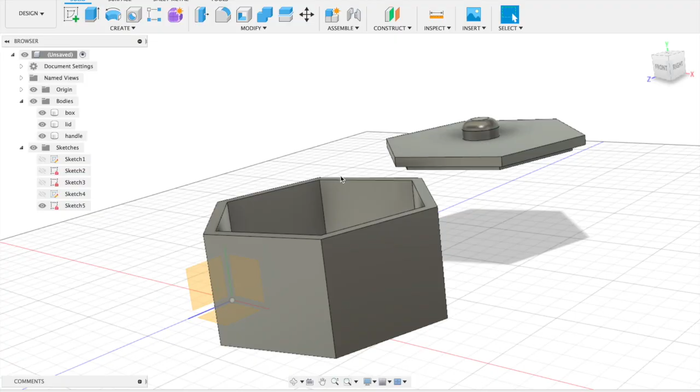Welcome to Fusion 360 Build a Box. We're going to do a quick tutorial on how to build this hexagonal box with a lid and kind of a handle knob at the top.

It's got the inset lid as well, but we'll be using some of the same tools and some new tools as well. First, create a new design.

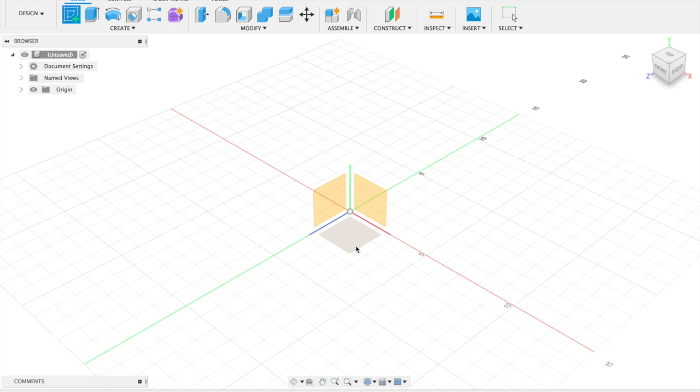File, new design. Then turn on your origins, create a sketch, click on the bottom plane, go to create, and we're going to use the Polygon tool.

You can play around with these, but this is the one we're going to use in this tutorial, the edge polygon. Click, and I'm going to make it about 5 centimeters on one side, and as you drag out you see it creates the polygon.

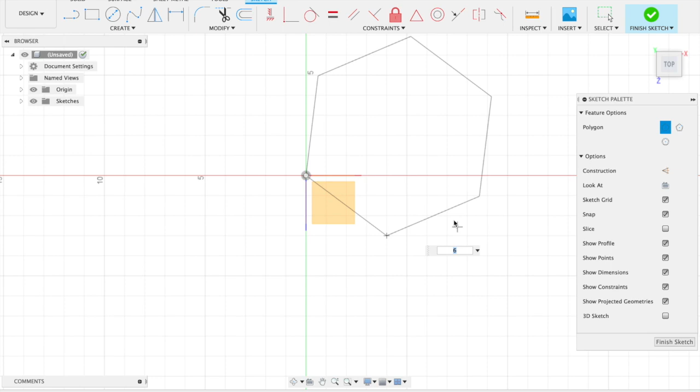You can change the number of sides. Wow, that's a really big one. But we're going to stick with 6.

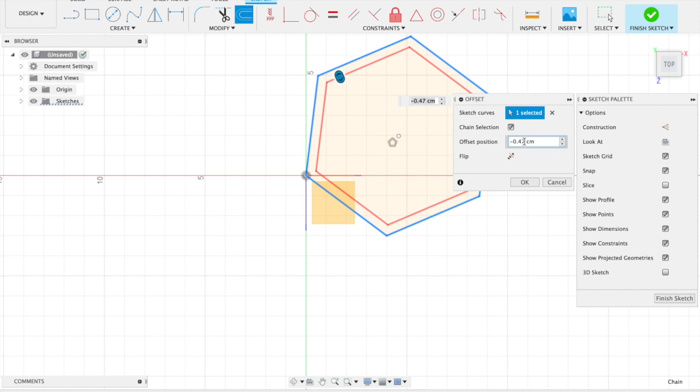We're going to do an offset of that polygon to create the walls in the box, and we're going to change that to 5 millimeters, which would be 0.5 or negative 0.5 centimeters. Then stop the sketch.

You can click on both of these sketches or planes. We're going to use the inside one first to form the bottom of the box, and we're going to bring it up not 5 centimeters but 0.5.

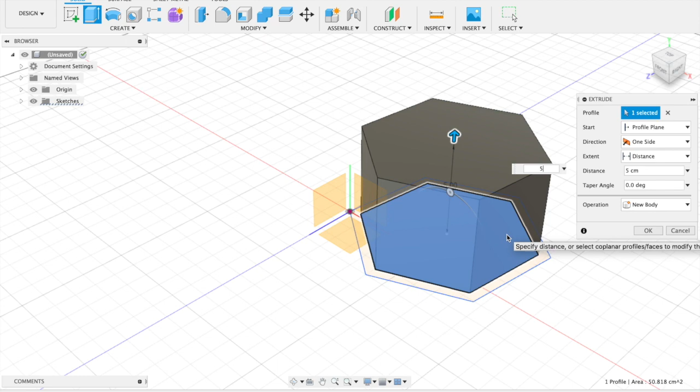There we go. That's the bottom. When you finish the extrusion, it turns the sketches off, so go ahead and look in your browser, make sure you have them, and turn the sketch back on so you can see it.

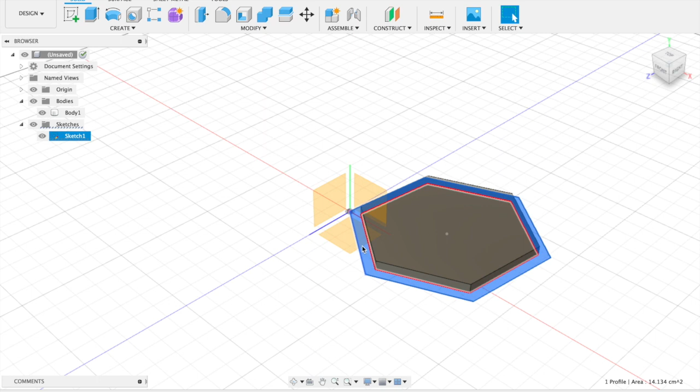Click on the outer hexagonal pathway and do an extrusion again and bring it up to 5 centimeters. Looks good. We are going to join it with the bottom so we have a completed box.

So make sure it's on join, click OK, and body 1 is now the box. It looks fabulous, doesn't it?

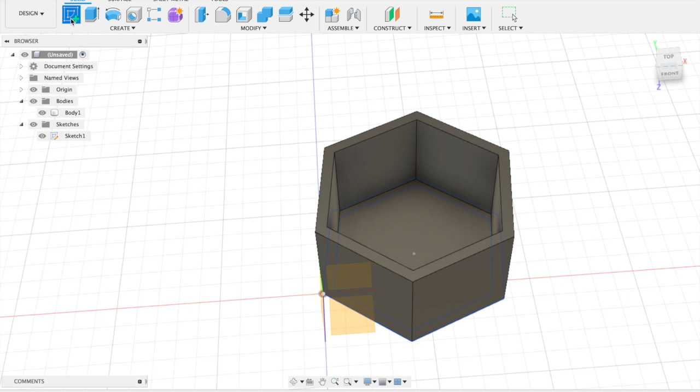Okay, the next thing we're going to do is we're going to create the lid. We're not going to use the split body and the shell. We're going to create a sketch, and we're just going to click on the top because that's where the plane is that we're going to create the lid.

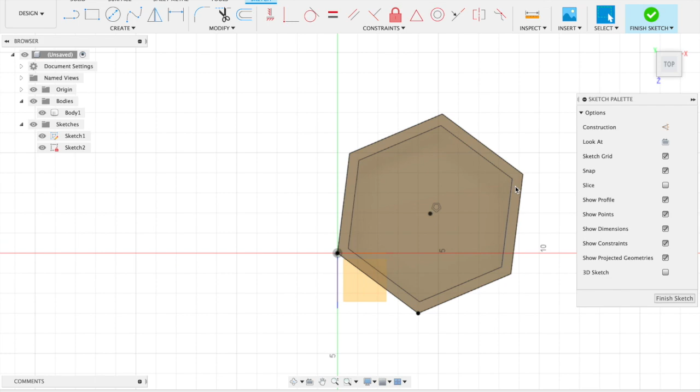Now we need to create a sketch of the polygon here at the top as well. So I'm going to start the sketch on the top and go back to polygon, and I'm just going to trace one of the sides just like I did on the bottom, and click OK, and you can see now I can do the same thing I did on the bottom plane, and I can click extrude.

Click on, I want both of those planes because the lid will be the whole thing. So I'm going to click that up 1 centimeter. No, I think I'm going to make it 0.5 centimeters, which is 5 millimeters.

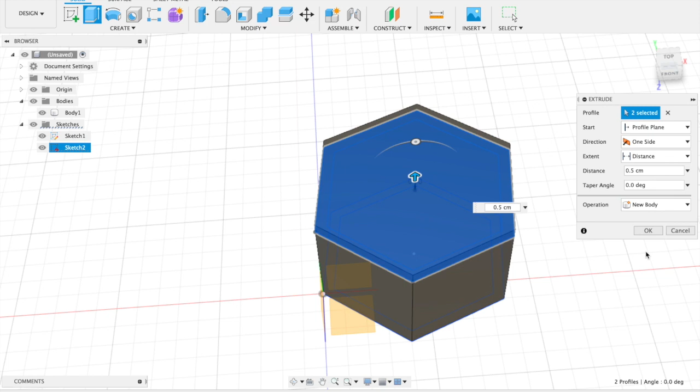I do not want to join it. I want the lid to be a new body, and click OK. You can see over here I'm going to change the name of the box to box, and I'm going to change the name of body 1 to lid.

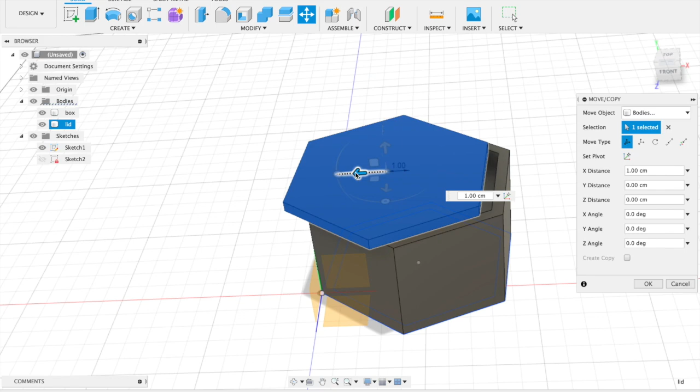Alright, that's fabulous. Now I'm going to move the lid out of the way by clicking the move tool. Click on the top and just use one of the arrows to move it out of the way. Just like that. Once you're done moving it, click OK.

And we can look at the bottom because we need to make the inset. So again, create sketch, click on the bottom. We go into sketch mode.

We're going to use that handy offset tool. We can click on the sketch that's on the bottom and put it inset again. Same thing, negative 0.6 should give a millimeter of difference.

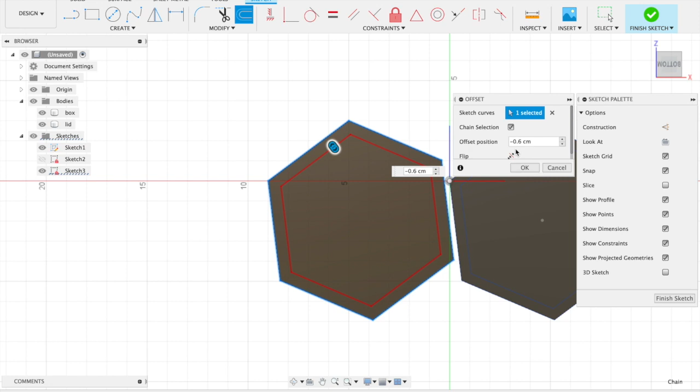Hit OK. Go ahead and stop the sketch and click on that center part, which will go down into the box. Click extrude. Make sure you click both of them, and then 0.3 should be enough. 0.3, and we're going to join it because we want it to be part of the lid.

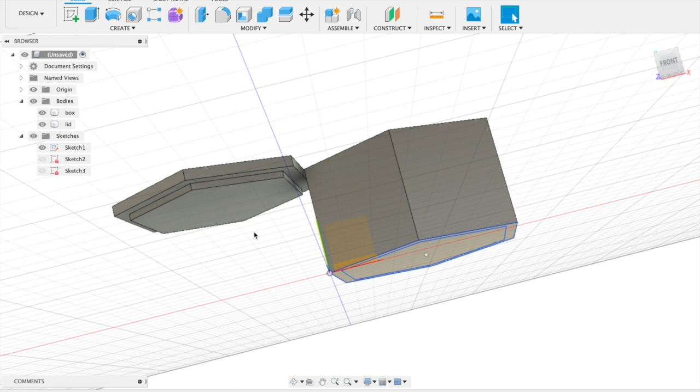Okay. Now we're going to work on that knob or the handle, the circular handle. We can create a sketch.

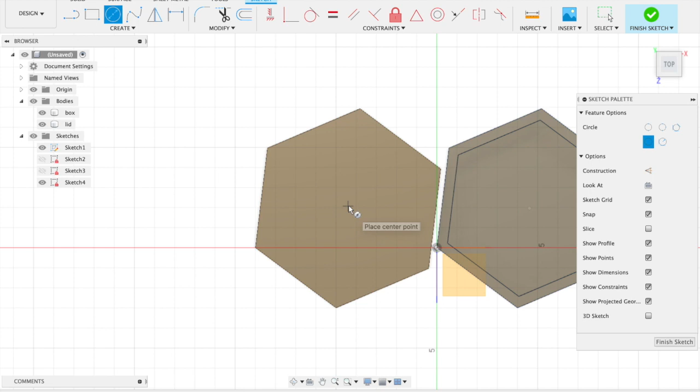This sketch is going to go on the top of the lid, and we're going to draw a circle just in the center. We're going to print this separately so we can glue it on in the right place, but we're going to make it 2 centimeters.

Okay, so go ahead and stop that sketch. Now we can use the extrude tool again. We're going to click on the circle, and we're going to extrude it up, let's do 2 centimeters. Let's see if that works.

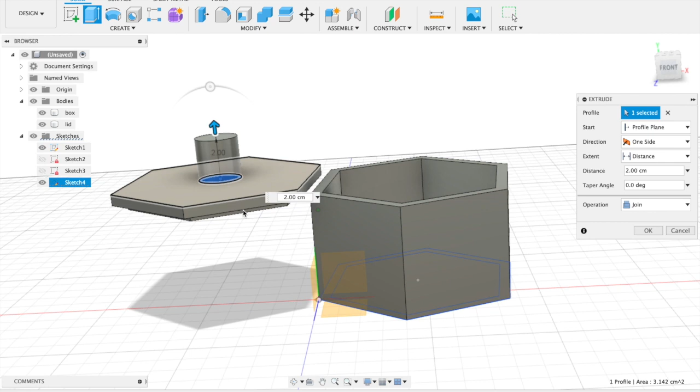We do not want to join it. We want to click it as a new body. That will be our handle. Hit OK. And now we're going to round it off a little bit.

Oh, first I'm going to just change the name to handle. And we want to round off the knob and make it a little bit more rounding by using the fillet.

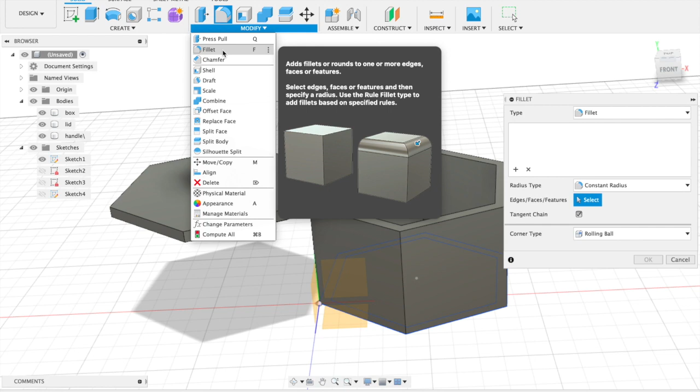Click on the fillet tool right here in the modify. You can click on any edge of any body and kind of round it off. It's a nice way to make some design modifications.

Okay, so I'm going to do that again. Fillet, click on the round, and then round it down like that. So that's as much as I can.

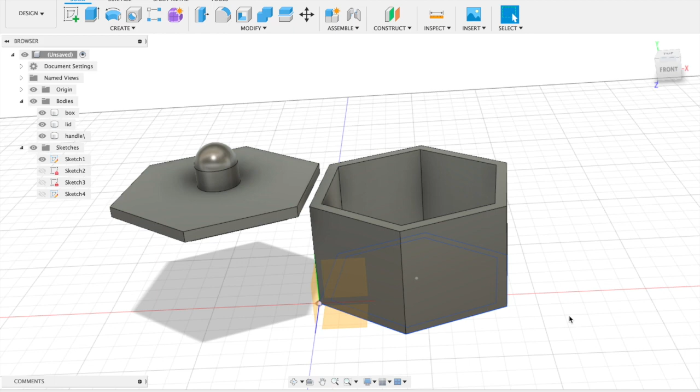Okay, I don't really like the top of that knob. It's a little too large, so I want to shorten it a little bit.

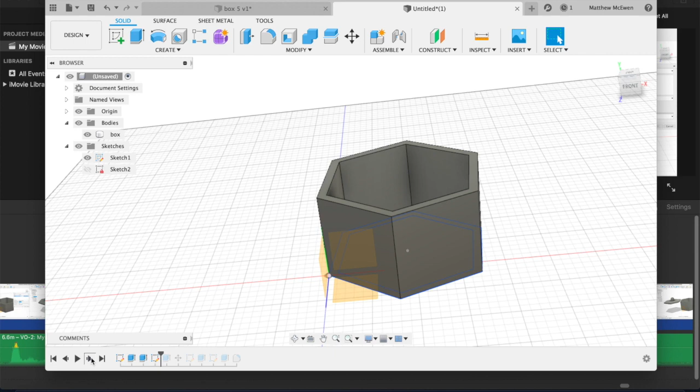So I'm going to double click on, if you look at the bottom of your Fusion 360, there's something called the timeline, which records every single one of the tool uses. And you can go back and change them and make changes to them even after you've done 100 different tools.

Which is really powerful. So what I want to do is change the extrusion. So I find where the extrusion was right there. I double click it real fast, and it'll bring up the tool dialog box for that extrusion. And I can just make changes to it.

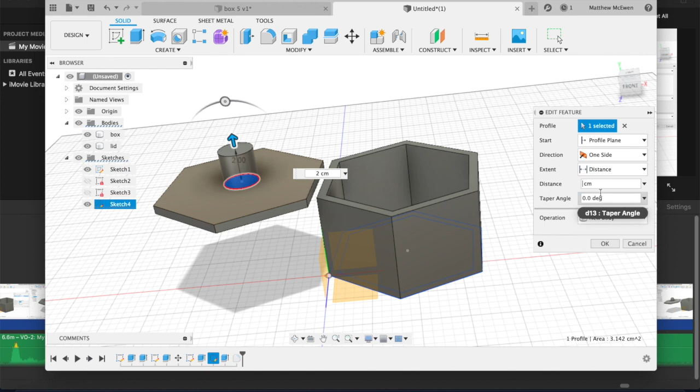So instead of the 2 centimeters that I had chosen at first, I'm going to move that to 1 centimeter and just hit OK. And it automatically changes, and the fillet is still there, but it's on the 1 centimeter. So I'm going to double click the fillet, bring up its toolbox, pull it back a little bit. I like that knob, but just a little bit better.

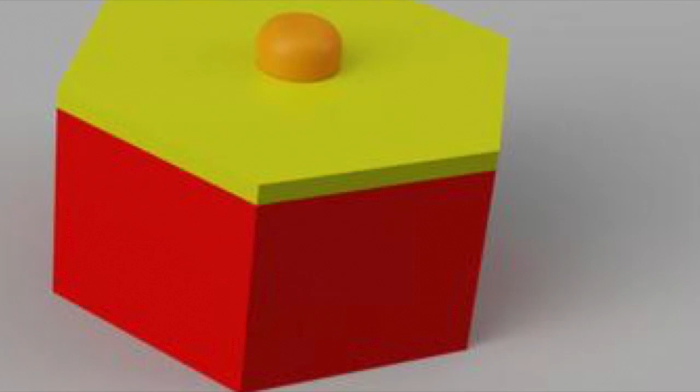And there we go. So remember, you can use the timeline to go back and make changes. Okay, thank you very much.